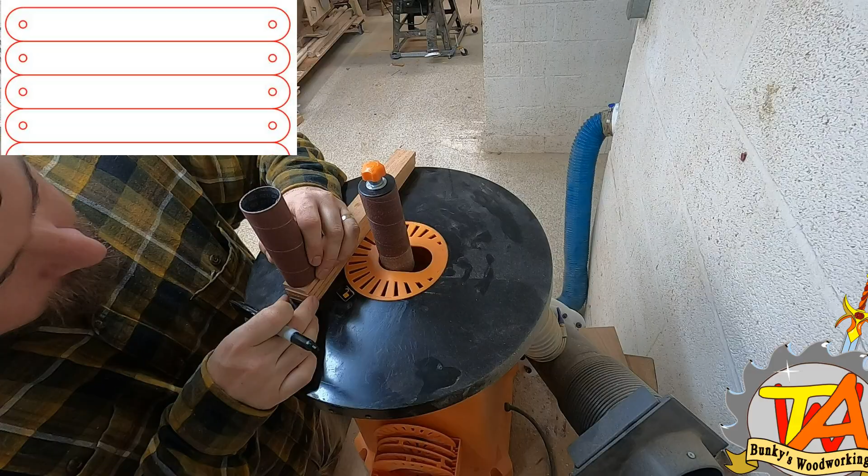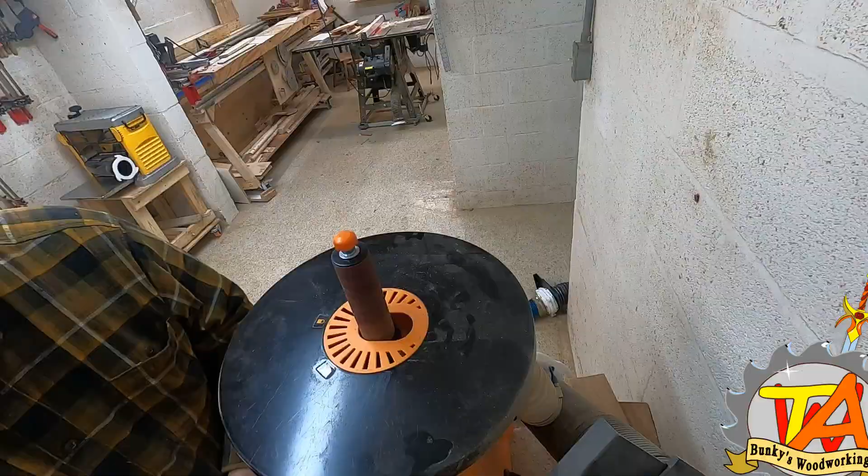I use a spindle from the spindle sander in order to get the desired circumference, and I try to follow that line with the bandsaw. And I finish off the rounding over process with the spindle sander. While doing this, I chamfer and round over any sharp edges. I can proudly say that this project is good enough for who it's for. A little rough around the edges, but it does the job.

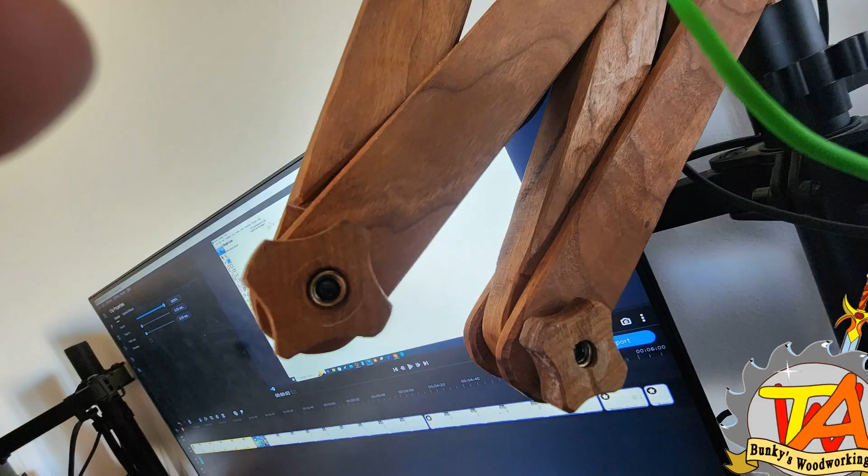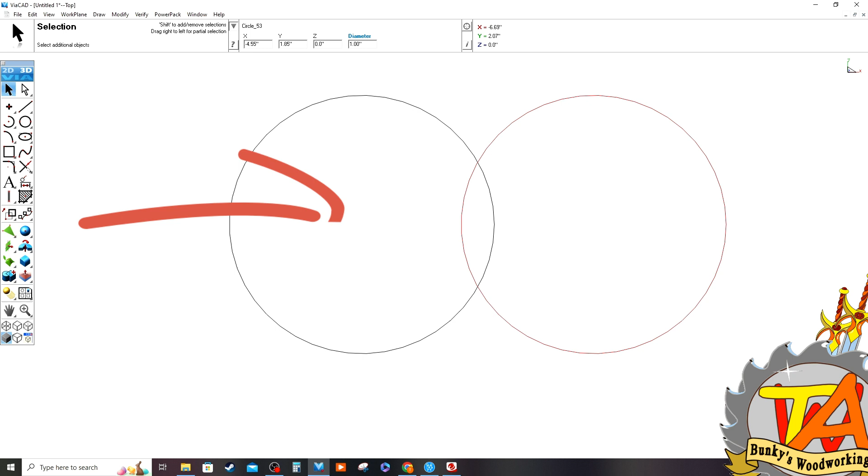Now I go about making my handmade knobs, and my knobs did not turn out as good as the ones in my drawing, but I will tell you the process in which I thought this would have worked. Using a hole saw, I would cut a circle. Then using the same hole saw, I would make another circle about 3/4 of the distance of the circle's radius. A round wood blank can be placed in this circle, and the edge can be cut out with a hole saw bit. And rotating it 90 degrees 4 times will get a shape that works as a knob.

I used a spare piece of plywood for this project, and using a hole saw bit, I made the first hole. I didn't want the wood blank to fall back out of the back of the jig, so I glued on a piece of small 1/4 plywood. I did an estimated guess on the distance and cut the second hole. Then using the same hole saw bit, I cut a bunch of blanks using some cherry.

We ended up getting these 1/4-inch 20 threaded inserts that I needed to cut a hole that is 10 millimeters. So before removing all of the round blanks, I went ahead and drilled out all of the holes before cutting out the blanks all the way through. Now I'm able to attach the threaded insert to the blank and then tighten it on the jig. Now I use the hole saw bit to cut the corners off of the blanks.

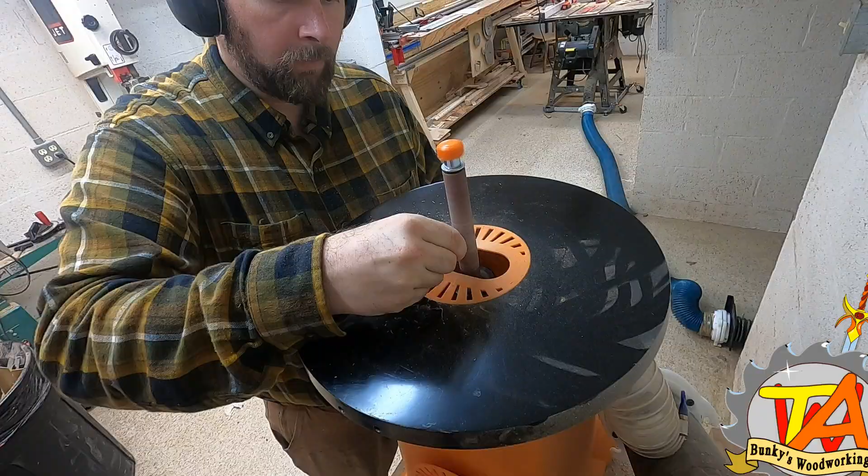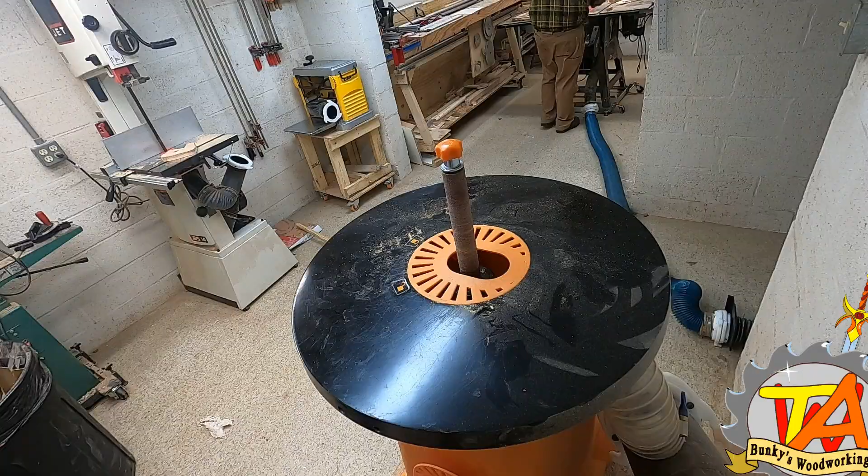Now my jig kept shifting just a tad bit with the torque of the drill, making it uneven, but it's perfect for me. Now I use the spindle sander to go over all of the knobs. These knobs ended up being a little thick for my taste, so I ended up resawing them with the bandsaw. After this, I start fitting all the pieces together. And I had to drill out all the bolt holes. It made it easier to attach all of the arms together and then drill one continuous hole.

I had a boatload of these hex bolts left over from a bed that got destroyed just by regular use within 30 days. And honestly, that's how we got into woodworking. Now we have the arm up to this point. Now we got the shape there, we wanted to go ahead and add one more thing.

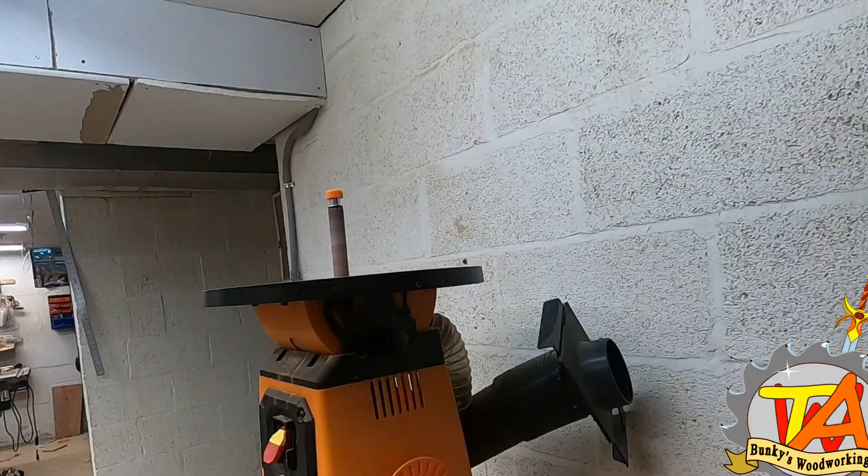I used a tongue and groove jig and set a piece of wood at the angle that I desired and clamped it into place. This makes these diamond-shaped rests. The angle that everything was clamped was a little over 45 degrees. After this, I did one more round of sanding. I decided to be lazy and put the whole thing together and then apply a coat of polyurethane. And I ended up taking it apart as I was putting the polyurethane on so everything would dry nice. I ended up applying only 2 coats to this.

So we needed the hex bolts and the threaded inserts, as well as some washers for the knobs. But we also need a hanger bolt and a 5/8 to 3/8 mic stand adapter. I cut off the tip of one of the end pieces so I could put it in the hanger bolt. I cleaned the arm up with some sandpaper. After all of this was done, I put a coat of polyurethane on it, and I basically just did my best drilling a straight hole through the top of it in order to thread in the hanger bolt.